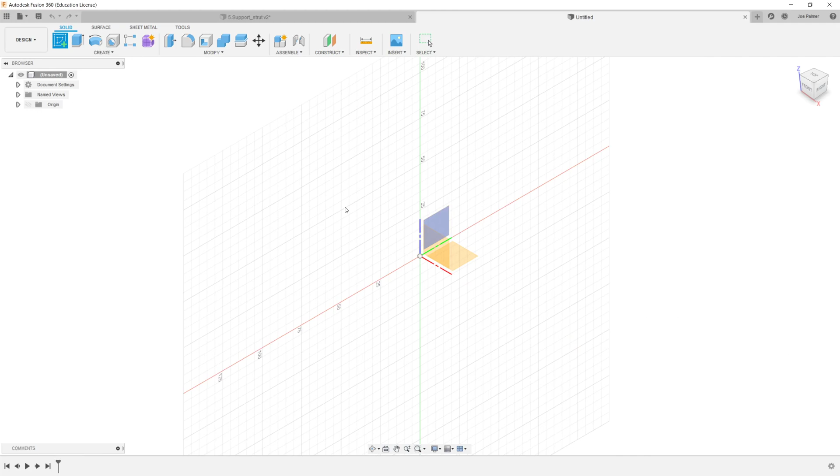For this particular component, I'm going to create all of my 2D information inside a single two-dimensional sketch and then use multiple extrude features to construct the main body. To create that sketch, I go to the Create section and click Create Sketch, and this time I'm going to sketch on the XZ plane, or the front plane of my component.

This is a deceptively complicated component, and I need to think carefully about how I construct the geometry. So the first thing I'm going to do is draw a rectangle to represent the width of the central portion, and then another rectangle to represent the U section at the end of the component. I'll use my 2-point rectangle tool to sketch a rectangle from the origin of the component out towards the right hand side.

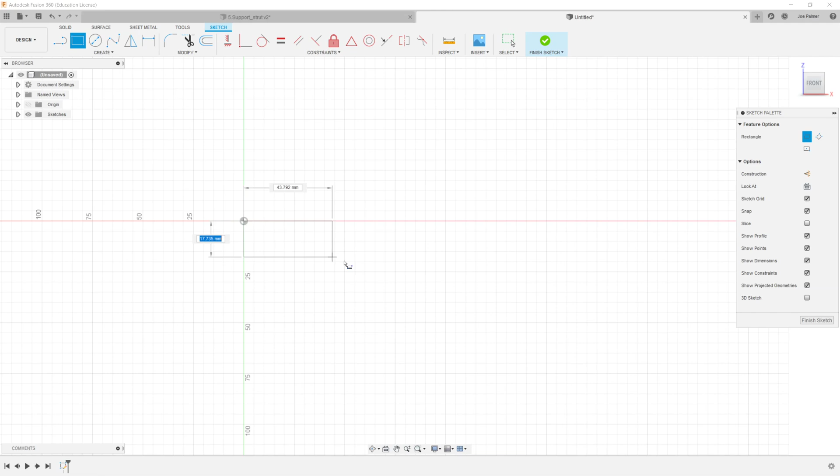Then I'm going to sketch another rectangle from the lower right hand corner of that initial rectangle and somewhere up here. Okay, so I've got an approximate shape of my support strut, and now I need to apply some dimensions as per the engineering drawing.

I know that the distance from the top of the component to the bottom here is 50 millimeters. So I apply that correctly by going to sketch dimension, distance between the top and the bottom is 50, and I know that the width here is 36.

I'm also given some lengths, but because of the fully rounded end of this particular support strut, I need to add this feature into my 2D sketch before I start dimensioning things.

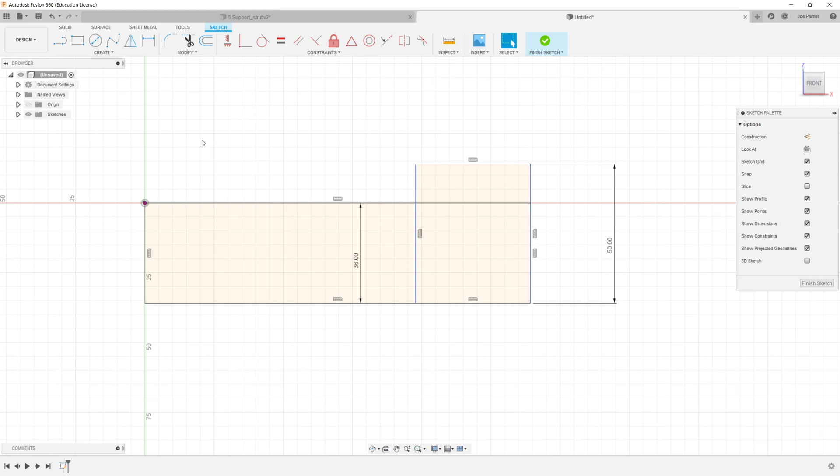If I go back to my component, I'm going to get my center diameter circle tool, and I want a circle which is centered on this end face and goes all the way up to this edge.

If I hover roughly over the center of this line, I will see that I get a blue equilateral triangle, and that indicates that I'm on the center of that particular line.

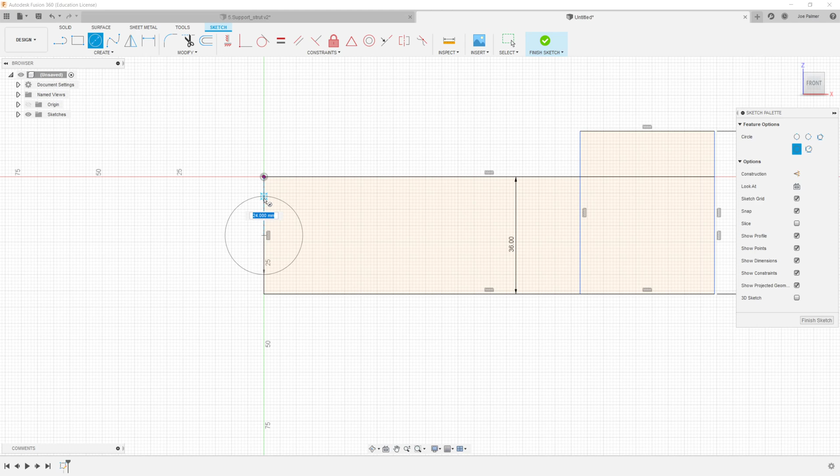So I hover over this and click to place the center of my circle, then move out towards the edge, and then move my mouse until I am lined up with the corner of my rectangle and snap my circle there.

We can see that that circle is fully constrained because it's got black lines, so I don't need to add any more information at this time to that particular circle feature.

The next thing I'm going to do is create a construction line which runs down the center of the component in this direction, and we'll see why we're doing that in a minute.

I'm going to go to my line tool and sketch a line from the center of this circle all the way across to the right hand side of the component.

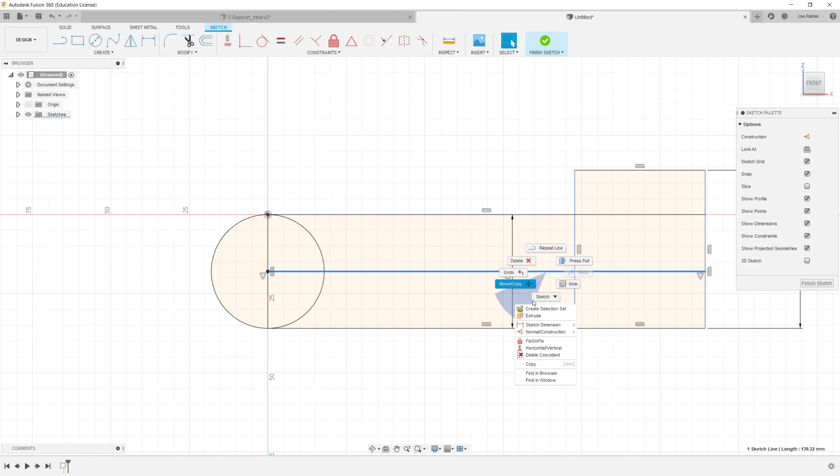Once I've done that, I press escape to get out of my tool, and rather than this being a solid line, I want this to be a construction line. So if I click the line and then right click and hold, I get the context menu, and from this context menu I can pick normal/construction, and that will turn that line into a construction line.

Construction lines are very useful in sketches because they allow us to put in more information than we might need to create an extrude or a revolve feature, but we can use these construction lines to construct and create other geometry within the sketch without creating solid profiles that might cause confusion later on.

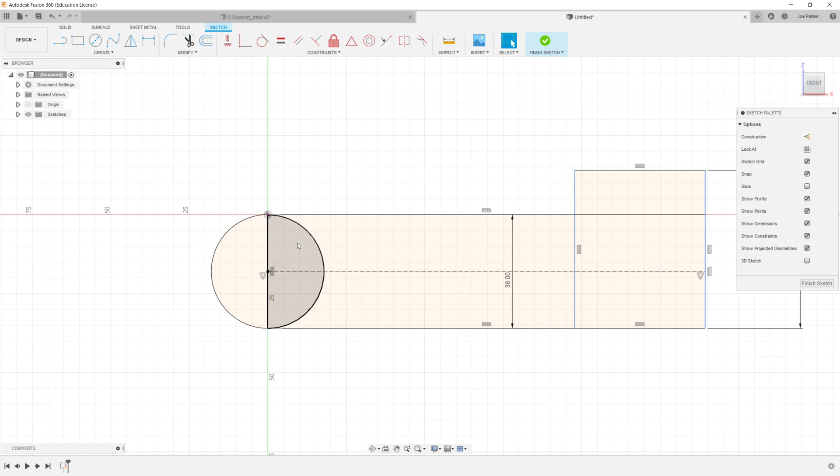Now that I have this construction line, I'm going to add in these circles which represent the holes at this end of the component.

I go back to my component, get my circle tool, and add a circle here which is centered on the first circle that we sketched, and then add another circle further down the body of the component but on this construction line that we've created.

We can see that these circles are both blue, which means they are not yet fully constrained. So I'm going to go to my sketch dimension tool and I'm going to dimension these as 13 millimeters in diameter as per the drawing.

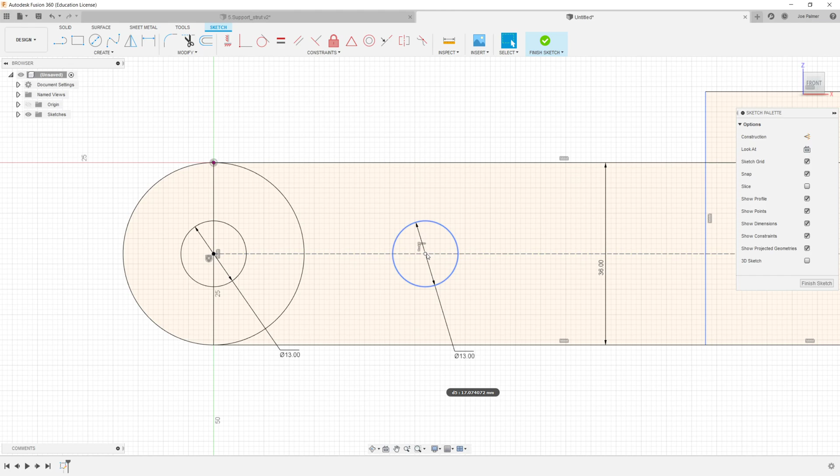Now we can see on this second circle that even though I've given it a diameter, it's still blue, and that's because the circle can still be anywhere on this line. We've not specifically set the location of this circle yet. So again, I go to my sketch dimension tool and I'm going to pick the center of this circle and then the right hand side of the component, and I'm going to set this to be 90mm as per the engineering drawing.

The next thing that I need to do is dimension the overall length of my component, which from the engineering drawing I can see is 130mm. So the distance from this center of this circle here to the edge is 130, so I can dimension that.

And then the next thing that I'm going to do is I'm going to dimension the width of the protrusion here, which I can see from the engineering drawing is 36mm. So again, I get my sketch dimension tool and I dimension this to be 36mm.

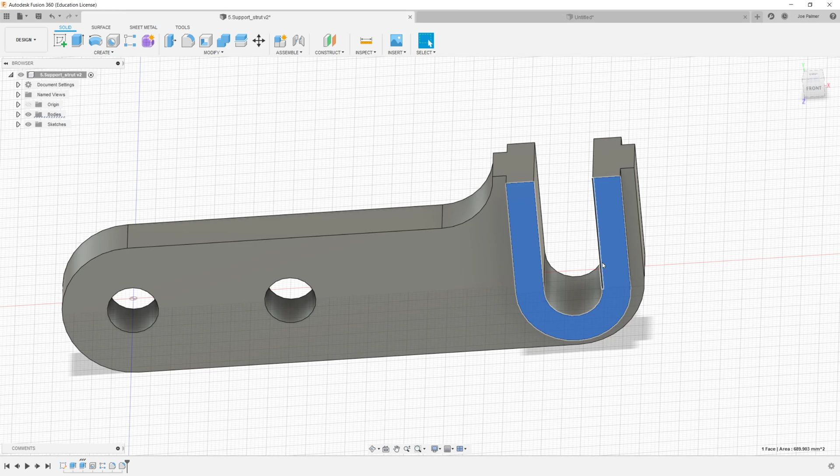Now at this stage I can see that all of my sketch lines have gone black, which means that the sketch is fully constrained and has all the information that it needs. But I'm still missing some features from this 2D sketch, so I need to keep going, and I need to construct the 2D sketch lines necessary to create the central U-shaped slot and the protrusion around the edge of that slot.

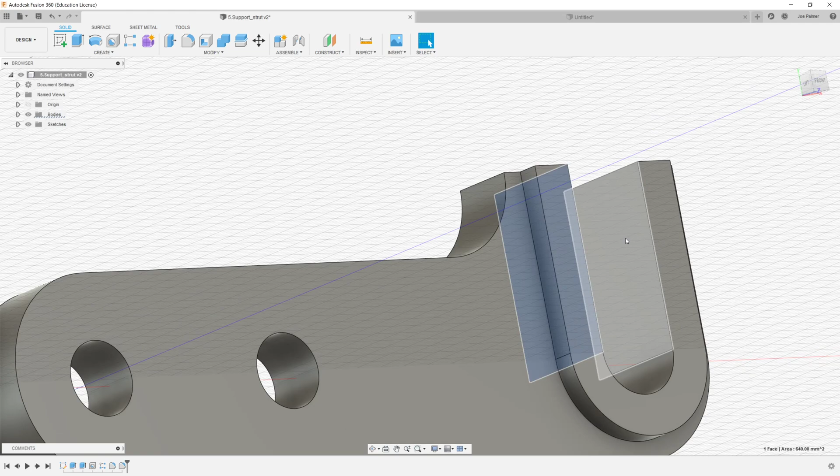So I'm going to get my circle tool again, and I'm going to put a circle approximately where I want the end of my U-shaped slot to be. Now I know that the diameter of this circle, so the distance between this face and this face, is 15mm as per my engineering drawing, so I'm going to dimension the diameter there to be 15mm.

And I know the location of this slot because that's also given on the engineering drawing. So I know the distance from the center of this circle to the bottom is 18mm, and I know the distance between the center of the circle and this edge is also 18mm.

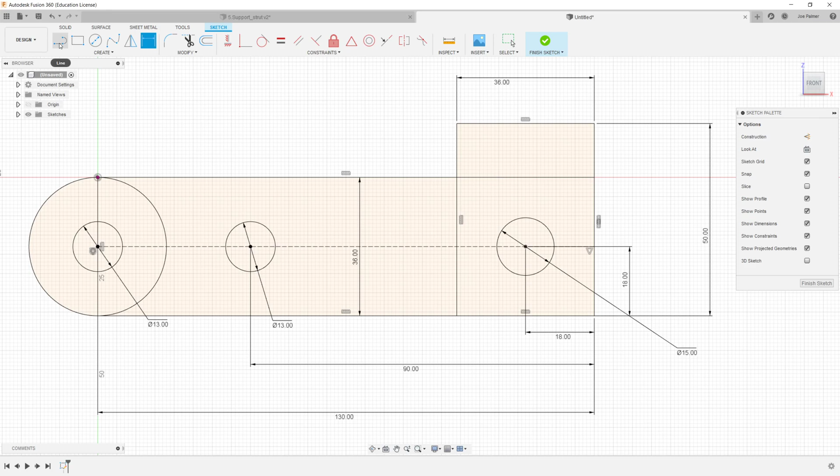So I now have a circle representing the bottom of that slot, and what I need to do is add lines in order to construct the rest of that slot. So I go to my line tool and I can create a line from the edge of my circle here all the way up to the top of my component, and I can do the same on the other side.

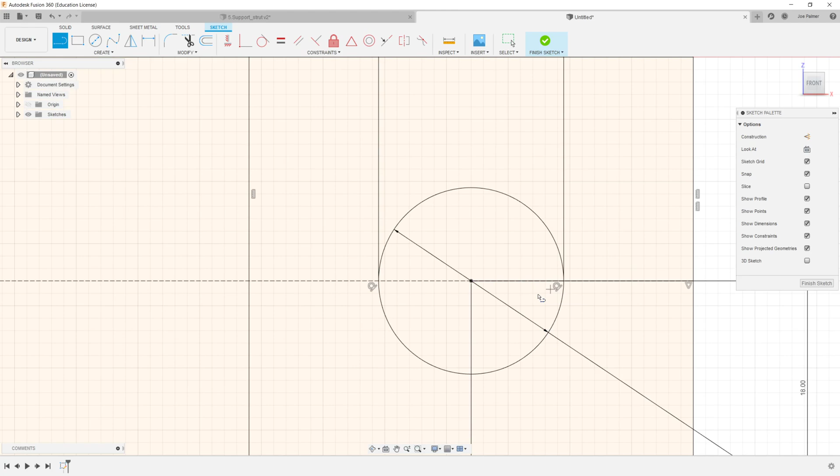Now we can see that Fusion 360 has automatically added tangent constraints between those lines that I've sketched and the edge of my circle. If this had not been the case, if I had a line like this for example, I could add that tangency manually by going to the tangent constraint in the constraint section and then simply clicking on this line and clicking on the circle.

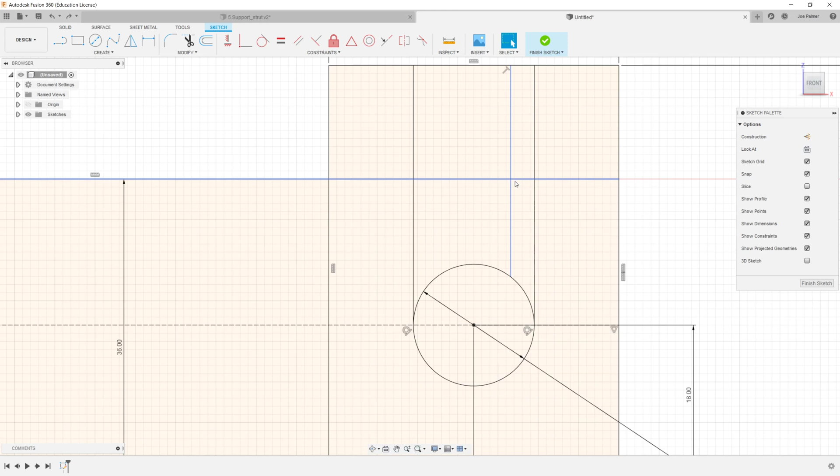I'm just going to get rid of that line by undoing that particular feature and deleting the line as well.

So the last thing I need is a sketch representing the outside of this U-shaped protrusion. So I can do this again by going into my sketch, getting my circle diameter tool, and I can again place a circle on the same center point and move that outwards.

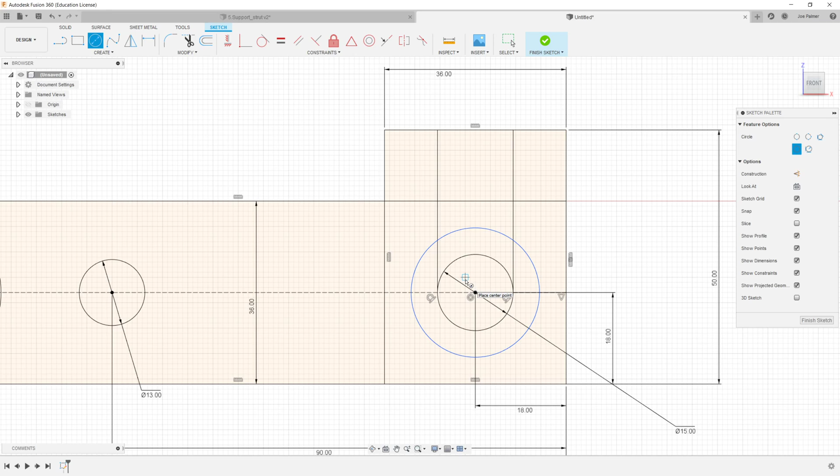I don't specifically know the diameter of this circle just yet, so I'm going to create the rest of my lines and dimension those as per the engineering drawing, and hopefully there's enough information there to keep this sketch fully constrained. So once I place that circle, I'm going to get my line tool.

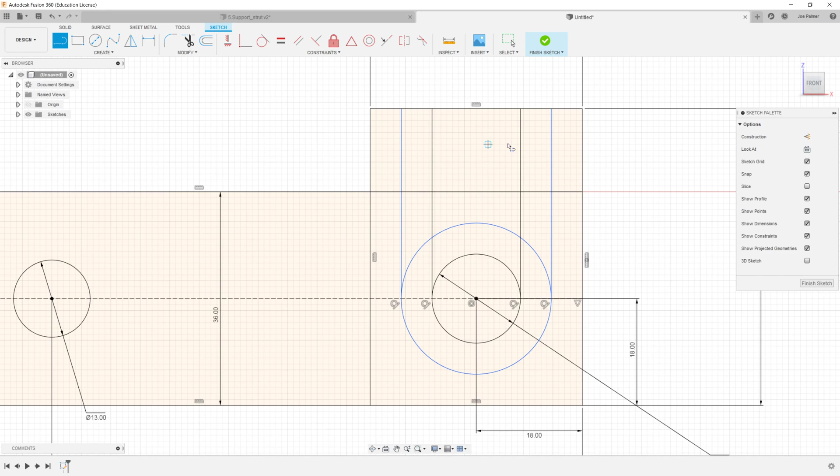Again, I'm going to sketch from the edge of my circle to the top of my component, and I know that the distance between these two lines is 29mm as per the engineering drawing, so I can dimension that as 29.

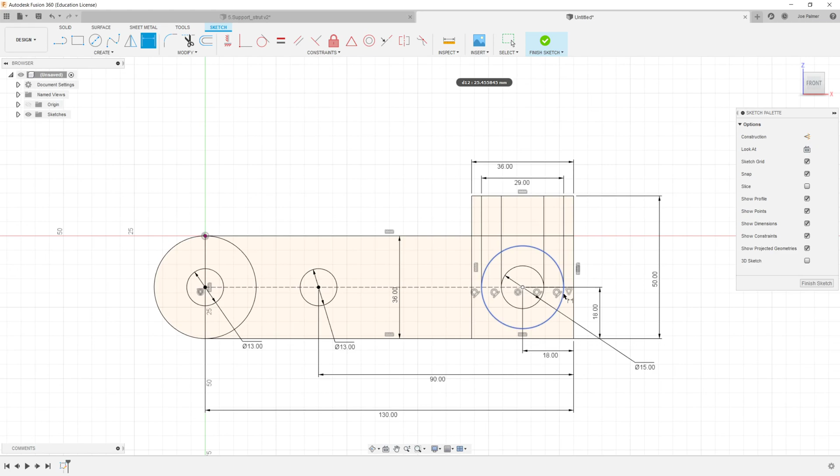So we can see that all of my sketch lines have now turned black, meaning that my sketch is fully constrained. If we wanted to at this stage, we could use the trim tool to remove bits of line that we don't feel we need.

There is a slight risk involved in this though. If I go to Modify and Trim, I can start removing bits of the sketch that I don't need. The risk is that you remove a bit of sketch which has a constraint applied to it, and that makes your sketch no longer fully constrained.

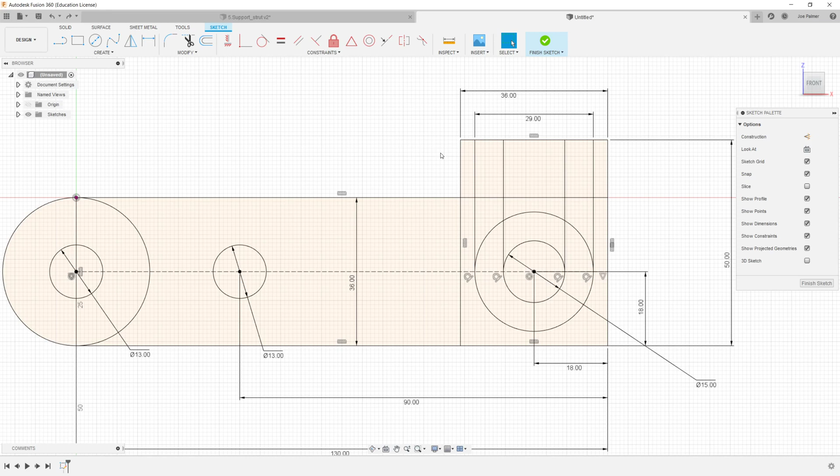So actually what I would do is leave these bits of sketch line in, because it doesn't present too much of a problem for us when we create features later on. So I'm done with this sketch, I can press the Finish Sketch button.

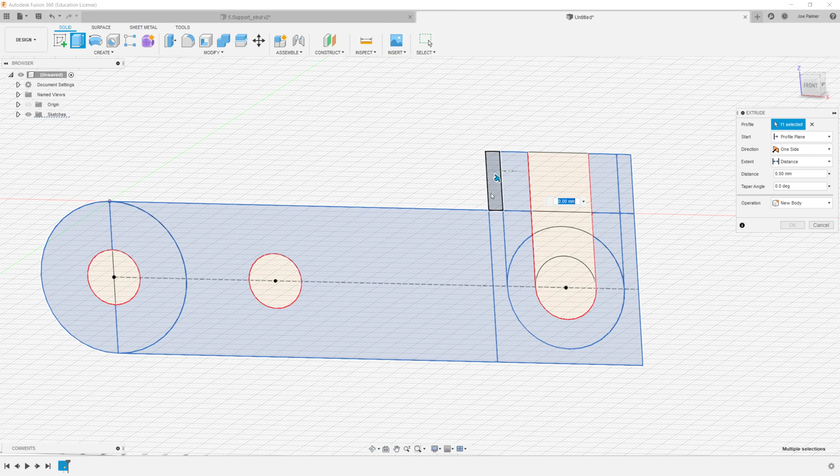Now all I need to do is create my extrude features. If I go to Create and Extrude, I'm going to select all of the geometry that I wish to extrude for the central body of the component, just by clicking all of the different profiles. I know that this extrude feature is 12mm wide as per the engineering drawing.

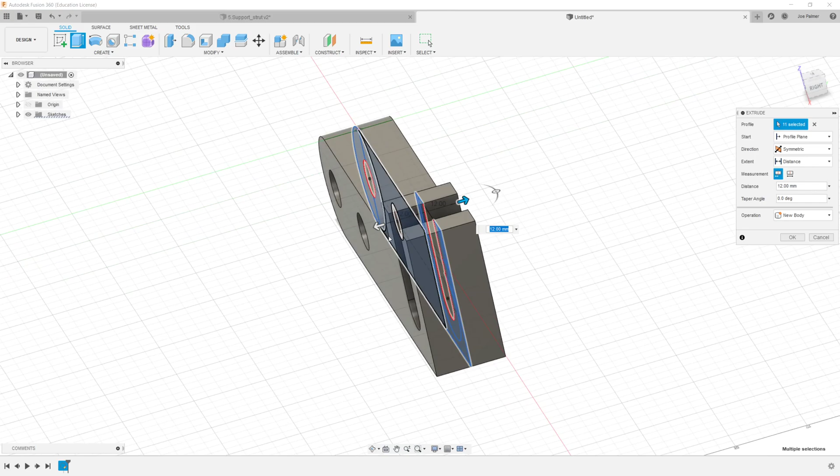Now, for this particular component, rather than creating a one-sided extrude, we're going to create a symmetric extrude. If I look at this extrude feature as it is now, this looks a little bit too thick compared to my reference component. What's happening is that Fusion 360 has defaulted to a half-length measurement when I've changed this to a symmetric direction. So we just want this to be the whole length, and we can see that looks much better now.

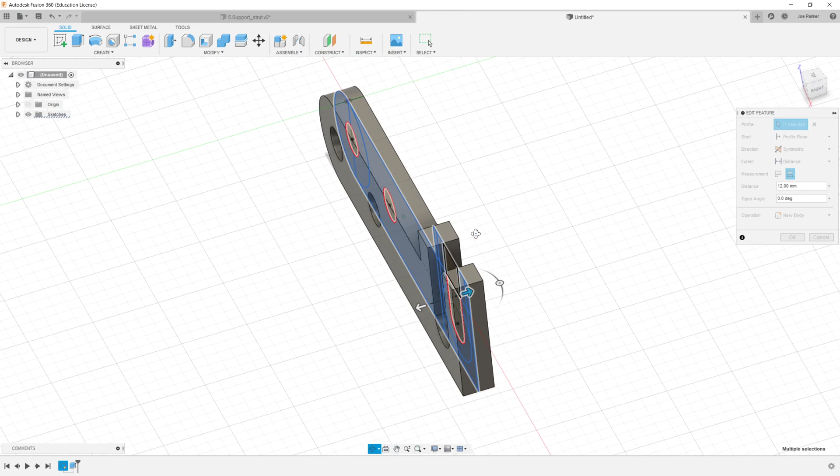So I've now created the central portion of my support strut component, so I can press OK. Now I just need to create an extrude feature for this ridge, or this U-shaped ridge around the center. So again, I can create another extrude.

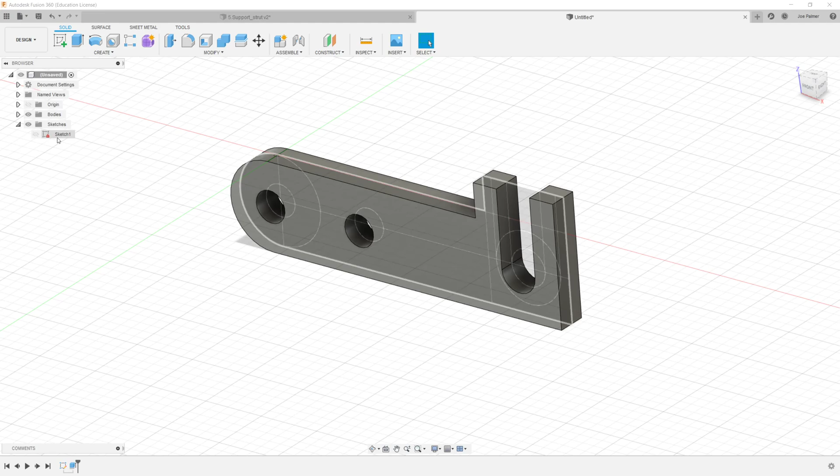Unfortunately, Fusion has automatically hidden my sketch. So if I go to the sketches drop down in the browser window and click the eye icon next to sketch 1, I can re-enable that sketch. And then again, I go to extrude, and it's going to ask me which profiles I want to extrude.

Now, we have a particular problem here because Fusion 360, when we try and select profiles, will pick the surface which is closest to our mouse. So because we are representing a 3D component on a two-dimensional screen, wherever we hover our mouse, there is additional geometry, features, or sketches behind what we're picking.

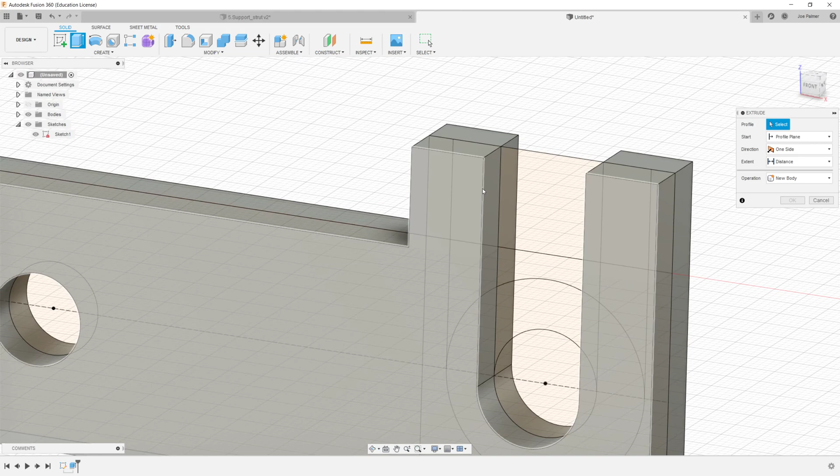So in this case, we have a sketch which runs through the center of the component. We want to pick this U shape, but we can't because Fusion is defaulting to picking the surfaces nearest our mouse. One way we can get around this is by using the selection filter.

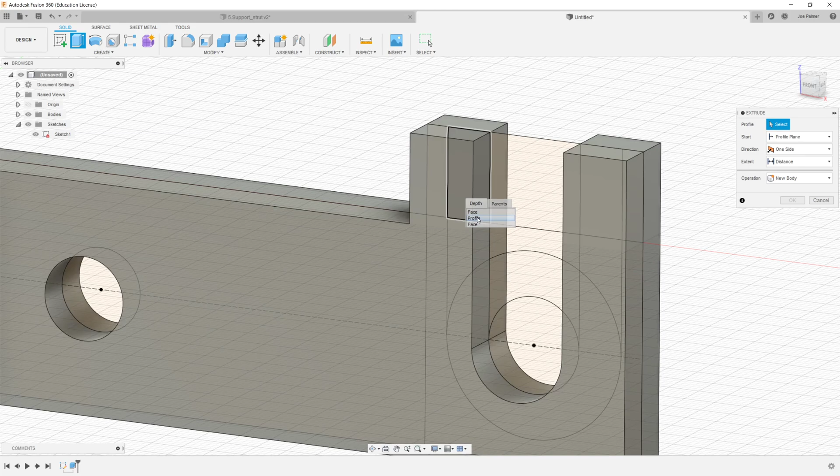So we get to where we want to select that piece of U shape. We press and hold the left mouse button, and we get a little drop down saying which things we can select. In this case, I want this bit of profile here. I can repeat this process all the way around in order to pick all of the profiles that I need for this particular feature.

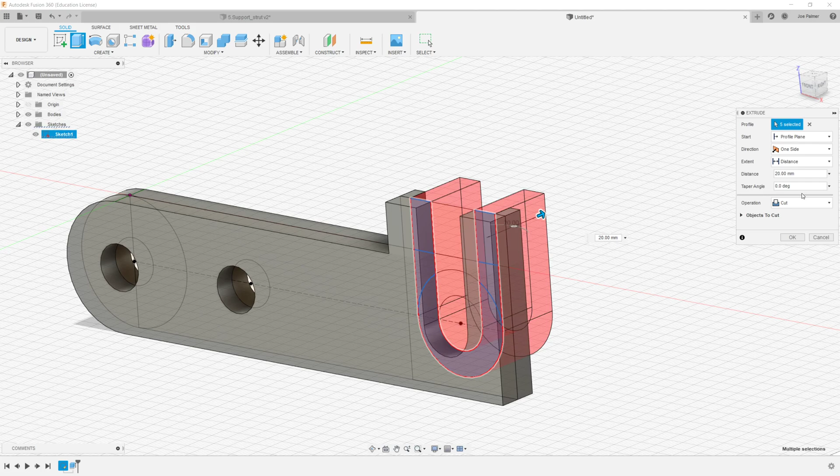I have all of those now, and I know from the engineering drawing that these need to be extruded a distance of 20 millimeters. Again, Fusion has defaulted to some incorrect parameters within the extrude dialog box, so I just need to fix these.

So again, I want this to be a symmetric extrude. I want the measurement to be the whole length, not half of the length, and I want to add material, not cut material away, so I need to change the operation from cut to join.

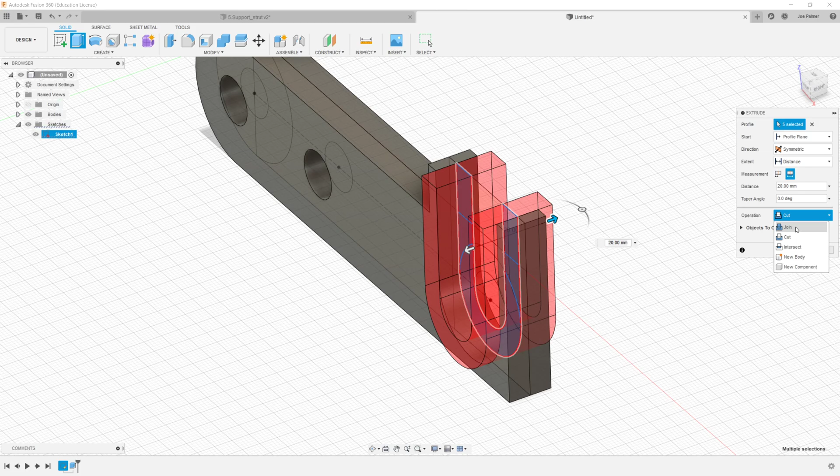Once I've done that, I can press OK, and I can see that I've got the main body of my component. I no longer need the sketch, so I can press the eye icon next to the sketch to turn it off and keep my component nice and neat.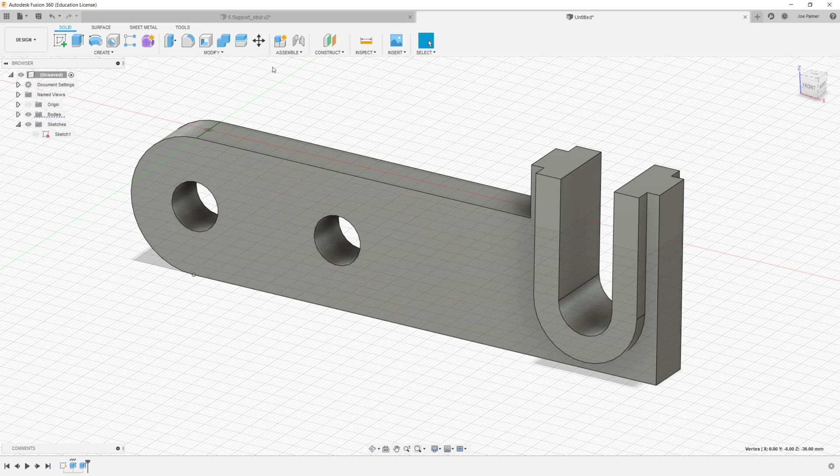The final thing that I need to do is add 2 fillets or radii to my component to finish it off. So I go to the Modify command and Fillet.

For some reason, Fusion has automatically picked a line. I don't want this line, so I can remove it from the selection box, and I want to add a fillet here of 18 millimeters.

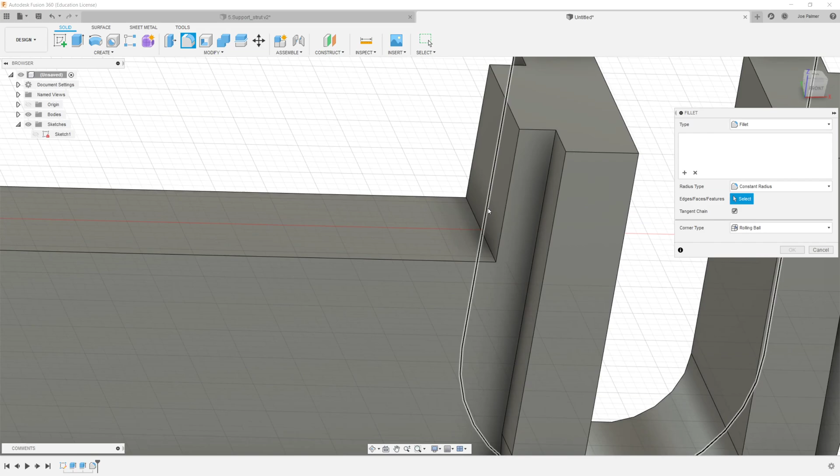I can press OK, and then on my final fillet, if I go to Modify and Fillet, I can add a fillet here of 14 millimeters as per the engineering drawing.

And that completes our component. So just a quick final check: I can see that I've created the main body of the component, the U-shaped slot, the U-shaped protrusion, and all of the necessary holes, and that looks correct.